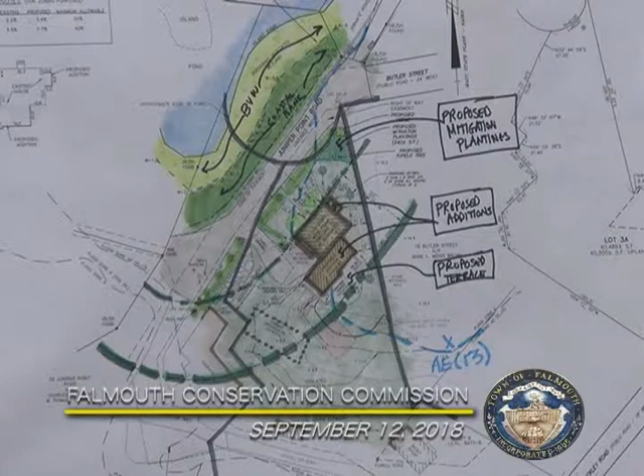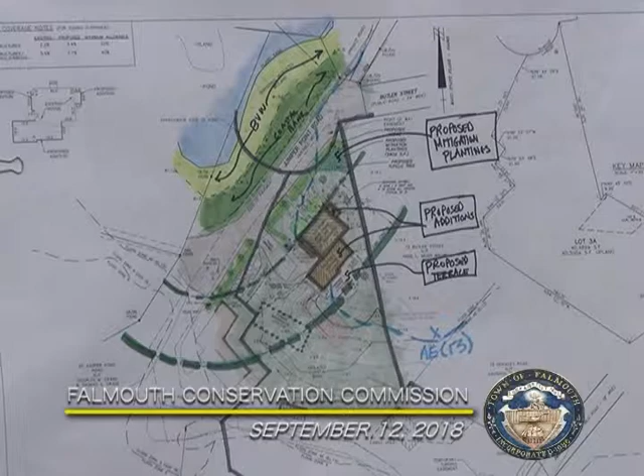The original plan, a copy of the order, and the compliance are filed in your package at the end. So in addition to the east and west of the house, as well as the south, we're proposing terraces, retaining wall and steps. The greenhouse was removed, and we are proposing 240 square feet of mitigation plantings, and these calculations include the removal of that greenhouse that was formerly approved. All roof runoff will go to dry wells. There is no increase in flow.

No questions, Mr. Chairman.

Although I admit to being confused about the site, I have no questions about the development.

Could you review again the history of the site? Sure. As you come in on Juniper, 26 is the small house that we're here for tonight. If you go further in, there's a house up on the hill, that's number 39. Sometime between 2012 and the present date, the property was subdivided into 3 lots. So 26 stands on its own, 39 stands on its own, and the vacant lot, 3A, that was here a few weeks ago for the other brother, Mr. Crane, is a vacant lot they're proposing to build a house on.

So those 3 lots are now separate. When this order was originally issued for number 26 to construct the additions, it was one property. In order to sell number 39, they needed to obtain compliance on the entire property, which would not allow number 26 to construct the additions, because that order of condition had been closed. So we're back here tonight just looking for permission to construct those additions.

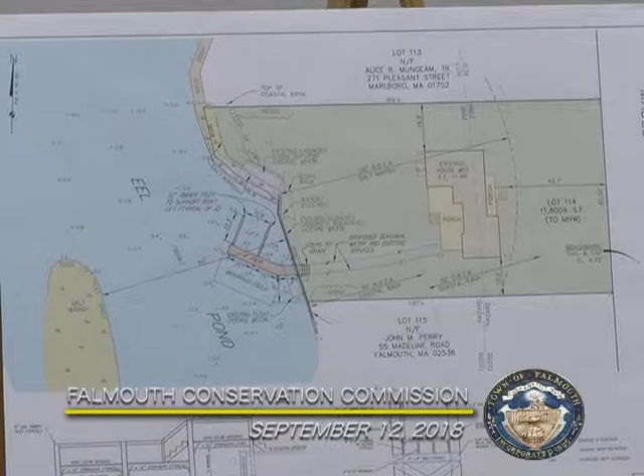Along the waterfront, the bulkhead, the existing float that Mr. Dimitrick currently uses to tie his boat, and the riprap, which is over here and partially covered by vegetation, so it's difficult to see - they're all licensed under license number 8336.

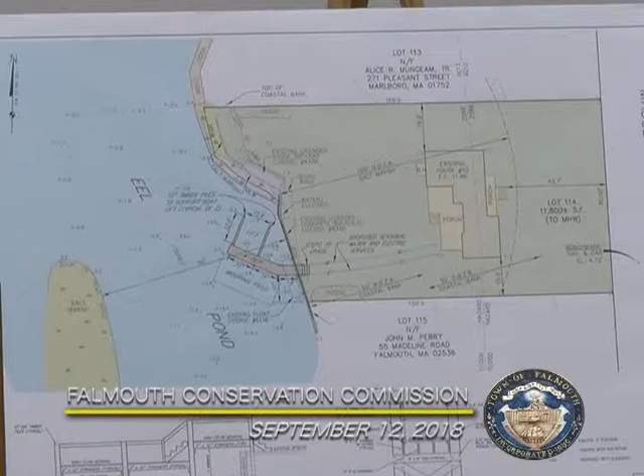In addition, when Mr. Dimitrick went through the process to license those, the first thing he had to do was get some recognition from the Conservation Commission. So in the notice of intent application, as an attachment, there's a copy of an RDA that was issued as a negative determination in 1999, May 5th, 1999. I was actually looking to see if Courtney or Maury's signature was on it, but I don't see it.

So we believe that the current structures on the site have good standing, and the proposal will improve the conditions. How will we improve the conditions? The existing float, which is in this location and shown as a rectangle parallel to the bulkhead, is a float, and it's also close to the bulkhead. The water depth is less than 2 feet, so on some tides I'm sure the buoyancy touches the bottom. The boat, when it's berthed to the float, is in shallower water than you would typically expect for a brand new application.

So we feel as though changing the configuration would improve things. Mr. Dimitrick would like to change things as well because he does have trouble at some tides gaining access to the float at low tides. So the proposal is to abandon the float but continue to gain access from the bulkhead to a fixed pier that would have on one side a hoist lift. I'm familiar with the lifts, where the boat can float into a cradle and be hoisted out of the water to protect the bottom, and also to secure it when he's not on the property from any damage during storms or wave action. But when he's actively at the property, he would keep the boat on this side of the pier.

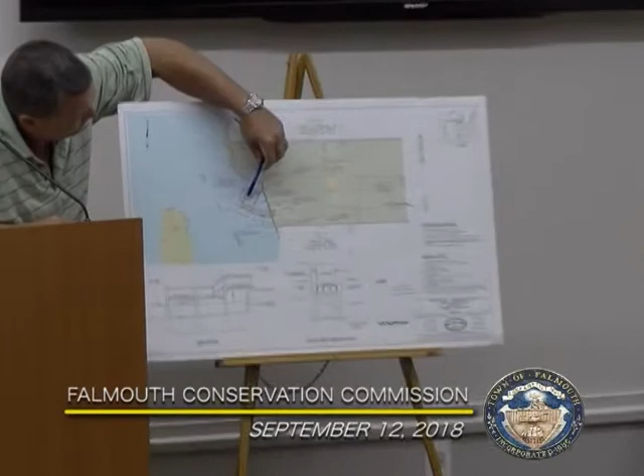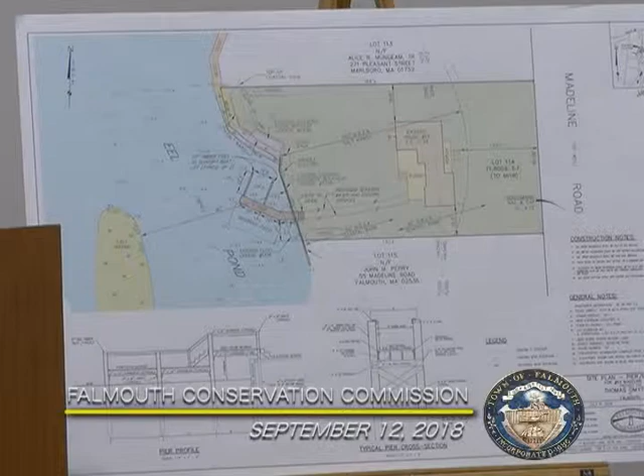Yeah, right there? Sure, it's 1.3 referenced to mean low water. So if you're coming in and around, he obviously uses the float now, correct? Yes. So it only puts one boat on that existing float. Yes. So now you're asking for the ability to dock 2 boats. No, we're not asking for that. In fact, he only has one boat. But you're showing a space for 2 vessels. Yes, but we would absolutely accept a condition that only one boat could be docked at this facility.

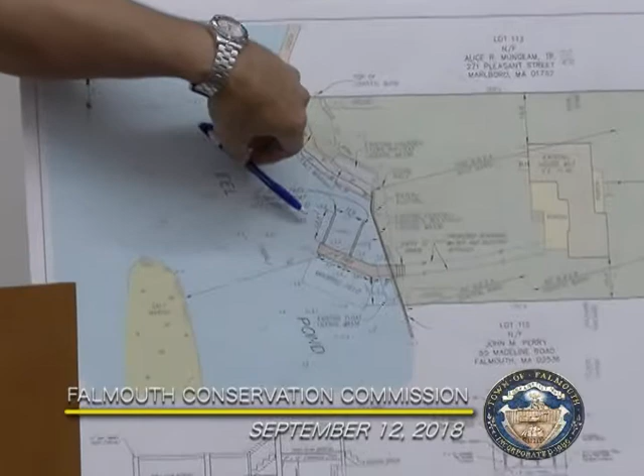So the way this works, if you can envision it, the boat would come into the cradle like this and be oriented like this, so the stern of the boat would be... The only purpose for the lift is to protect the boat from bottom scum, for lack of a better word. No, I get it, I know what it's like up there. And to keep it out of the water when he's not here. He's a weekend warrior, he's not here all the time. But when he is here, the boat would be tied as it would be routinely tied to a pier up and down Eel Pond. But absolutely one boat, no plans for any other boats.

Okay, that's all I have, Mr. Chairman. Peter? What's the square footage of the existing dock versus the proposed dock? Is there an increase in the square footage? Yes, the elevated pier is larger in square footage than the floating dock. The floating dock is approximately half the size of the elevated pier, but the floating dock is also in the substrate, bottoming out at low tide, and has the potential to cause impacts to the bottom. So it is larger, but the provisions of your regulation limit the size of a T or L to 100 square feet, and we meet that standard.

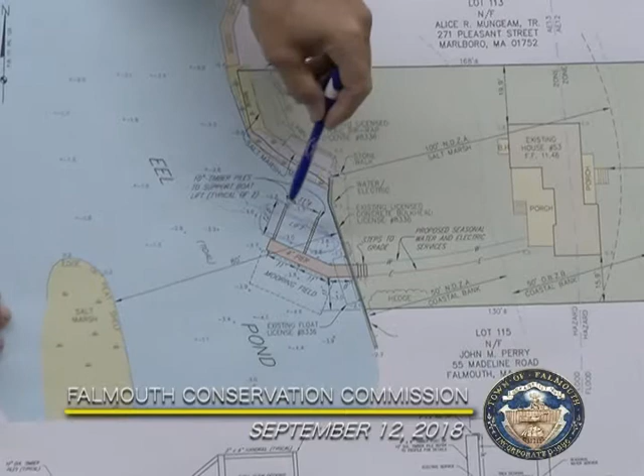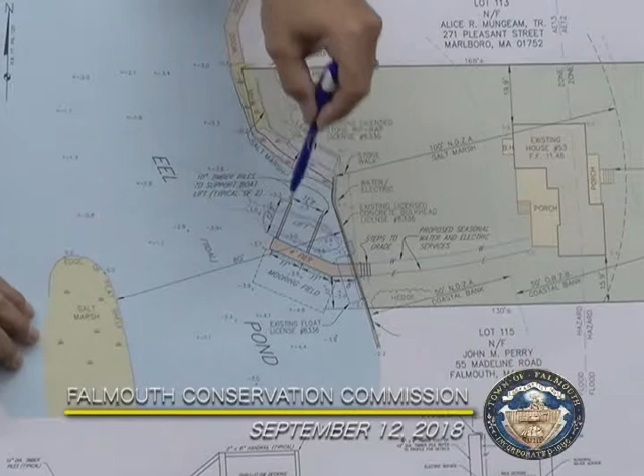Oh, I'm sorry, no, absolutely not. This is a cradle that lowers in the water so the boat can float. Right, I've seen them down in Florida - the cradles there go down like this, the boat drives in, the arms go like that, and they lift up. So this one's going across this way? Yes, these two supports are supported by two pilings here, and there's a hoisting mechanism, and the boat sits in the cradle like this and gets lifted up. Well, that would make sense, but that's not how it looks like it's drawn. I don't see any picture, you have nothing drawn for the lift, only the dock.

I can provide you with the catalog if I can get it from the owner. But that's the intent, as I just illustrated with my plan. Is there any way you could draw a cross-section on a plan, or even not on the plan but maybe email me a document on your letterhead that kind of sketches it out? Absolutely, I can share if I can find it, but here it is.

I'm sure I can get another copy of this, or I'll come get a copy if I need to. It's a Xerox of a black and white, but here it is. You can have that for the record.

Did you have a letter from Chuck also? There is a letter from Chuck. All right, so now it makes more sense. Thank you, sorry about that.

Then the next question I had was with the shellfish survey, I think we'll probably have to discuss, you guys can deliberate on that. You have the ability to require a shellfish survey. It is a larger structure. Well, I do think it's an improvement having the flow-through grating, getting the float off the bottom.

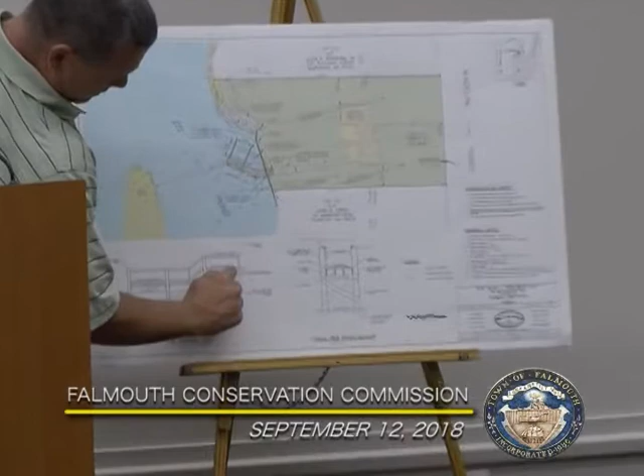Through flow or track space? If you look in the profile... if you look on the profile, it says through flow. If you look in the cross section, it says tracks, hence my question. It's gonna be tracks. My recollection is Mr. Dimitrick would like it to be Trex decking with proper spacing. We're not crossing any vegetation, so I can change the profile from through flow to Trex. So the through flow is erroneous. Yes, and the Trex will be 5 quarter by 6, with I think the requirement's 3/4 inch spacing.

Thank you. All right, what are you thinking? I know, I was liking the through flow. If you need it to be tracks, that's fine. Well, what are you gonna do about the condition for a shellfish survey? Now, you can deliberate on that. Okay, that's really up to you, guys.

Then I make a motion to close the hearing and take it under advisement. Second. We have a motion and a second. Any more comments from the board? Comments from the public? Hearing none, call for the vote. Before you vote, Mr. Chairman, a procedural question about deliberating on the shellfish survey. So what would happen if the consensus is that you want a shellfish survey? Would you make it a condition that we submit a shellfish survey when the hearing's already been closed, or would it be a denial?

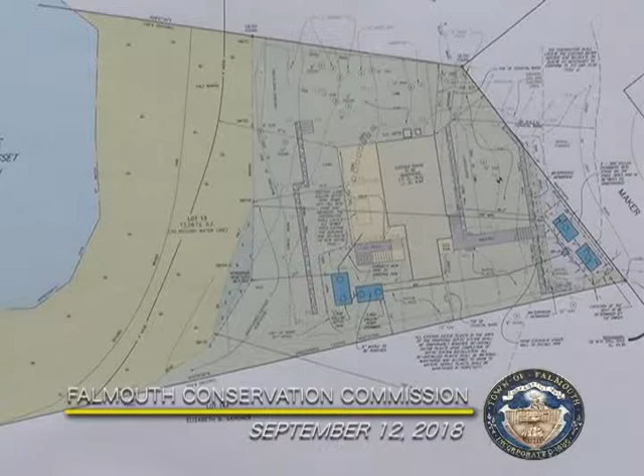I just mentioned that we shifted the tank and pump chamber away from the common boundary. I also attached on page 2 the construction methodology, since there was some discussion about it. That page goes through the procedure of how they're going to do it, from removal of the mitigation planting to reinstallation or replanting of new mitigation on the route to do the work for the septic system. I think that sums it up, and I'm here to answer questions.

Done? No questions. Courtney? No questions. Sorry. Peter? No questions. No, me either. Thank you for addressing all our issues. Thank you, yes.

I'll make a motion to take this under advisement. Second. There's a motion and a second. Any more comments from the board? Comments from the public? Hearing none, call for the vote. All those in favor of closing the hearing, say aye. Aye. Opposed? None opposed? Thank you, Mike. Thank you. The next one is opposed.

Next up, Peter and Andret, 27 Sunfish Lane, West Falmouth, Mass, for permission to raze and rebuild the existing cottage, upgrade the septic system, construct a driveway, and associated clearing, excavating, grading, and landscaping.

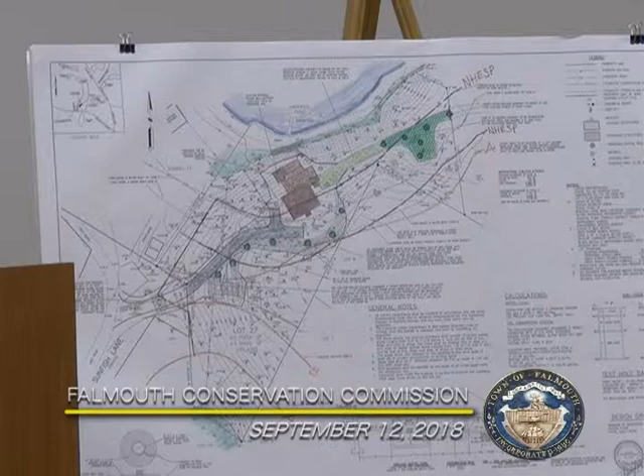But what we did, both times, we've had to develop the driveway coming out to Sunfish Lane due to access issues across the way the driveway now runs. And so this area of the existing driveway is being closed off with vegetation. And this, actually, if you went up that way, was the old...

lane sort of coming through. It went all the way through from Jigette Road out to Sunfish Lane. And so we've moved it to this location where more of this driveway is in the zone A than it was before.

I have some coverage notes on there. I cut back on the previous plan, this corner, the deck was larger, so I removed, I'm not sure how much, but I removed some deck from that corner that had been squared off in all of this right here. So that got removed, and you look at the mitigation calculations, it added up the existing house and deck and patio and the driveway going out in this direction.

And so now I have it compared with the proposed house and deck and the driveway, and other than 9 square feet, they come out the same, and that's based on all of this driveway becoming vegetated in exchange for this driveway, which was there, but it's fully vegetated now. This driveway being developed.

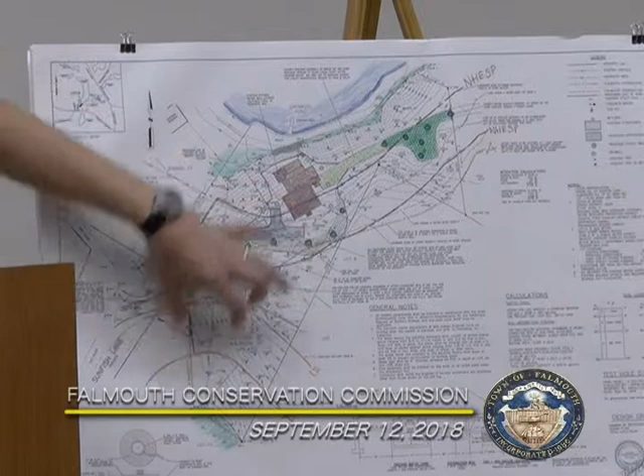That is, basically, so the septic system is going in here, the gravity feed septic system, the tank here, pipe running down the driveway and into this location, more than 100 feet from the wetlands, and then down drainage down the bottom of the hill here for the drainage coming down the driveway. Those are the changes we made.

I'll take any questions. Jen?

What's the purpose of the 4-foot wide path through your mitigation? Partly for maintenance and partly just, people have paths, it's just so they could have a path if... Where is the path going?

Well, like I said, starting off, just to be able to get through it for maintenance, but I mean, it's not necessarily going anywhere. We've seen mitigation areas far greater than this, but no paths for maintenance.

Okay. All right. And no, I don't have any, you said they're not, because you and I had talked about that pole that's requiring the access, they're not gonna move that? Well, the pole, this pole might be moved also, but it'll be down, if it's moved, it'll be moved toward the pond, so the wires don't cross this property corner.

Yeah, okay, all right. That's it, Mr. Chairman.

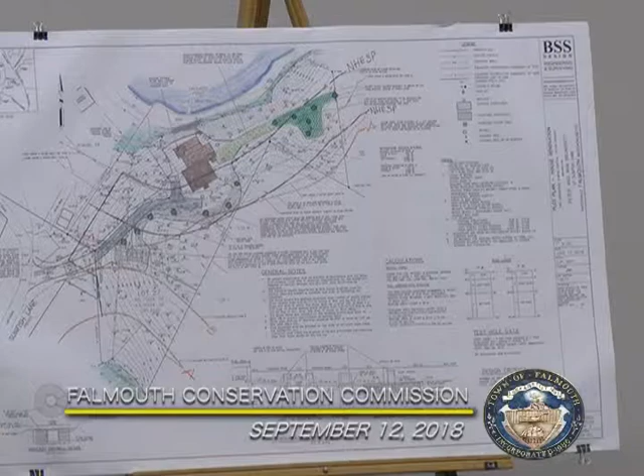You should have it, if not, you probably missed it. Yeah, keep it. Tom, if we don't have it, can you just shoot me a copy? Oh yeah, thank you. I'm sure I sent an email somewhere.

That's fine, you can go, Mr. Chairman. Kevin? Would you, I know you said it, just repeat why it is you're still coming this way for access,

wiping out all of those trees? Which way for access? Why is this driveway being developed here? The access that has been used for some years has just sort of been private property - it's just a dirt road crossing somebody else's land. They've been using it, but now that this project is coming up, it was determined that the Brundretts would come back out this way. Their address is Sunfish Lane, so to come in this way rather than crossing the other property.

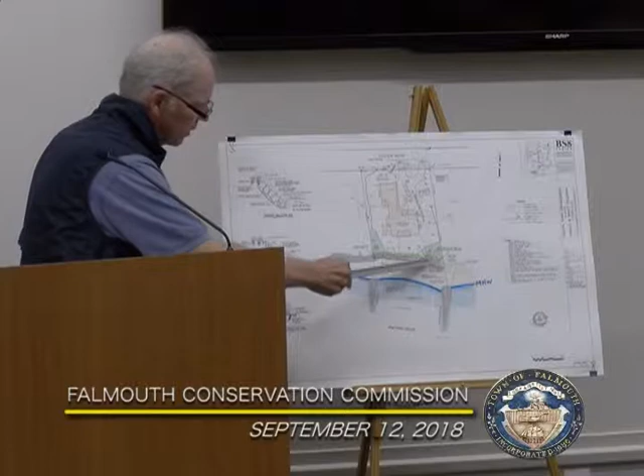...we would like to look at section BB. We have a soft engineering solution. I did look at the plans here for this project - it leaves the lot line without a good closure, in my opinion. So I think by coming off here, wrapping around and tying into the stonework, and then carrying down here and tying into this stonework, we've done a good job, I believe, of doing it that way.

The last detail is just for planting, and that'll come along after the excavation makes a mess of the place - I don't mean to laugh, but you know how it looks after an excavator goes back and forth. But that will be tidied up.

So some of the questions last time were whether or not we had a grandfathered structure. What I produced here in this small report was some excerpts from the town of Falmouth Wetland Regs, and that same section on coastal bank under the state regulations, coastal bank under 10.30. Basically it says you can't build new construction unless you had a structure here. Under the town regulations, 1989 is the year to have a structure that would grandfather the project, and under the state, it's 1978, the same.

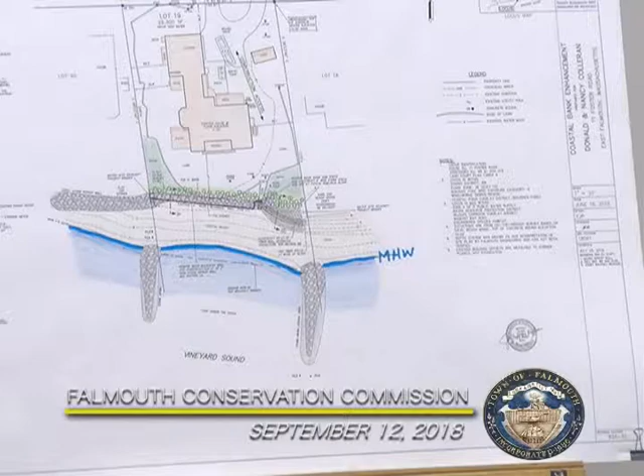In your proposed replacement, it looks as though the amount of plantings proposed are considerably less than what exists in back of the wooden wall right now, and perhaps those plantings are part of the reason why that wooden wall is still there. We can bolster that with more plantings if you'd like. That'd be fine.